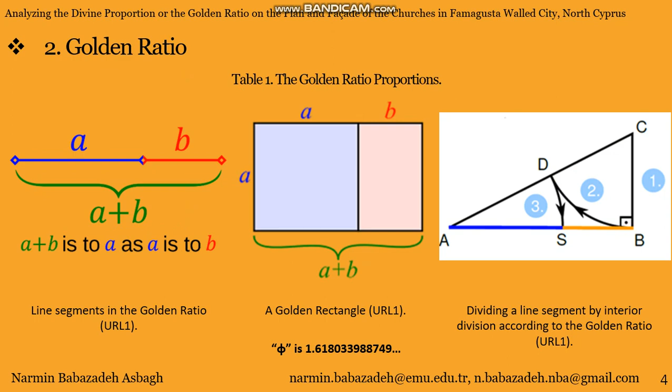The golden ratio is the proportion which is if we divide A plus B to A, that is the ratio of A to B, and the number is phi, which is almost 1.6, then we can say that this rectangle has golden ratio.

Fibonacci numbers. The Fibonacci sequence is a series of numbers which are added by the previous two numbers. That is, 1 plus 2 is 3, 3 plus 2 is 5, 5 plus 3 is 8, 8 plus 5 is 13, and that is going on like this. So if we divide the Fibonacci numbers to the previous number, the ratio is near the number that is phi, that is 1.6. And the more this number grows, the more the ratio of the dividing of a Fibonacci number to the previous number becomes nearer to the exact amount of phi, that is 1.6.

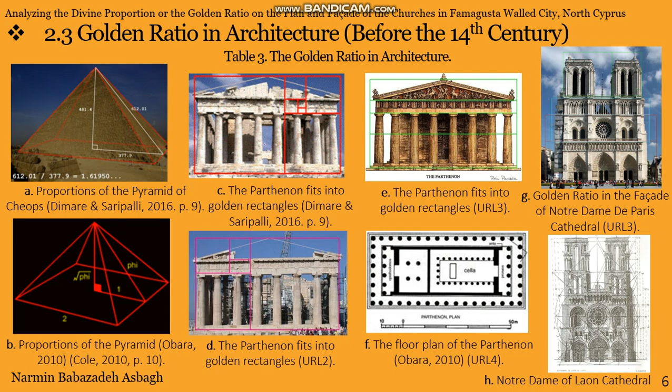It has been said that the Pyramid of Cheops, the Parthenon Temple, the cathedrals of Notre Dame de Paris and Notre Dame of Laon have golden ratio on their facades and plans.

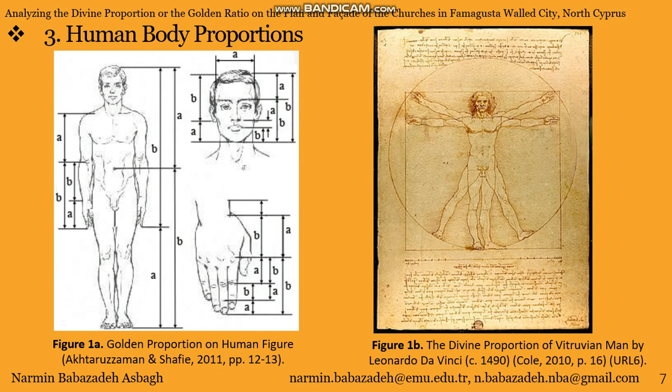At first, in 1490, Leonardo da Vinci drew a Vitruvian man, which shows the human body inside a square and a circle with open arms, which suggested that the total height of a human body and the total width is the same. It has also been said that the golden ratio is on the different parts of the body, including the face, hand, and all over the human body.

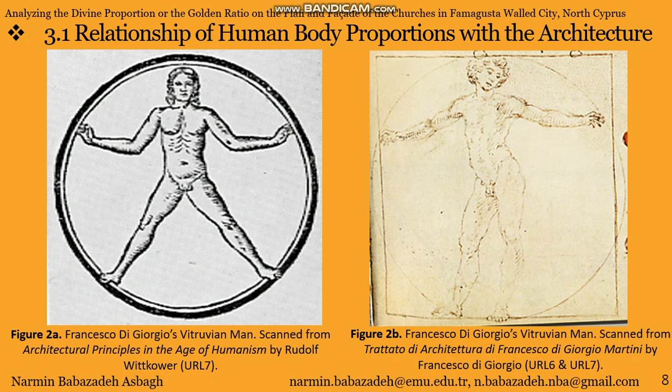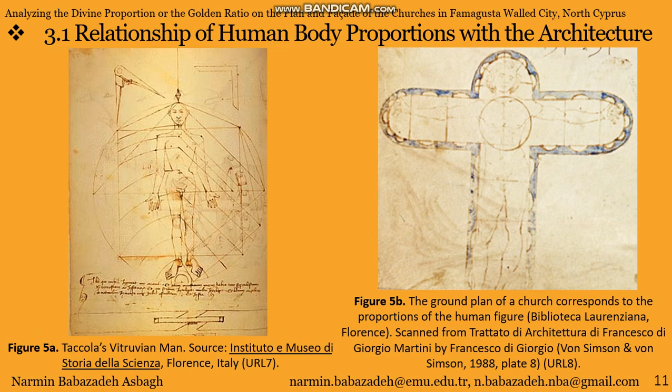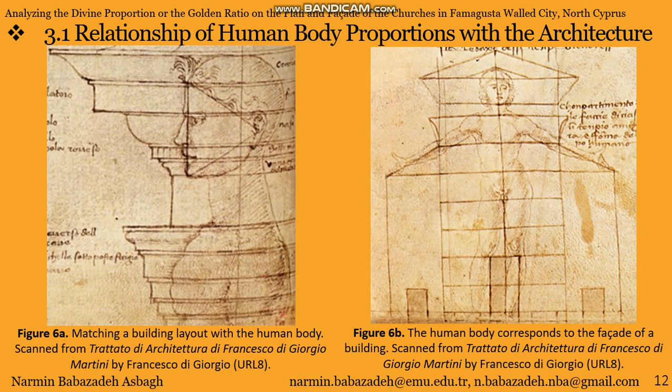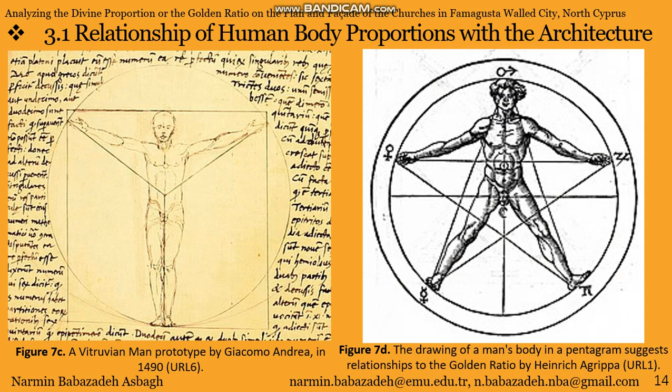On the left, the Vitruvian Man of Giacomo Andrea, and on the right, the drawing of a man's body in a pentagram that suggests it has the golden ratio, drawn by Heinrich Agrippa.

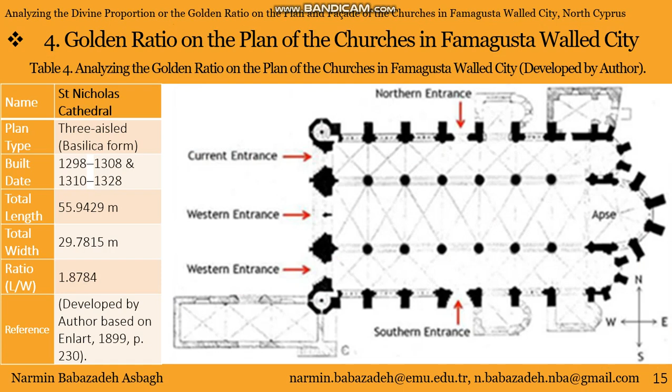All the plans of the churches in Famagusta walled city are measured by laser meter by the author, and the total lengths and total widths and their ratio are going to be seen in these tables. The ratio of total lengths to the total widths on the plan of St. Nicholas Cathedral is 1.9,

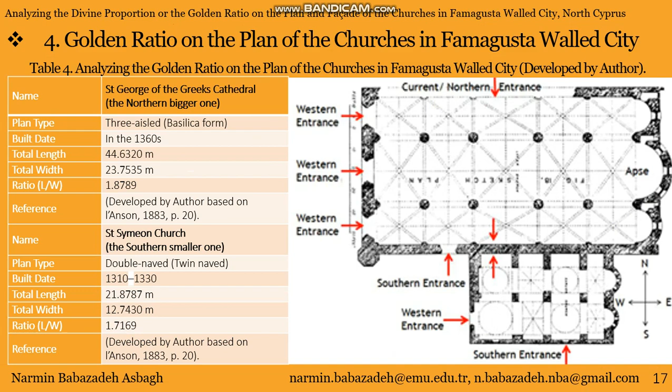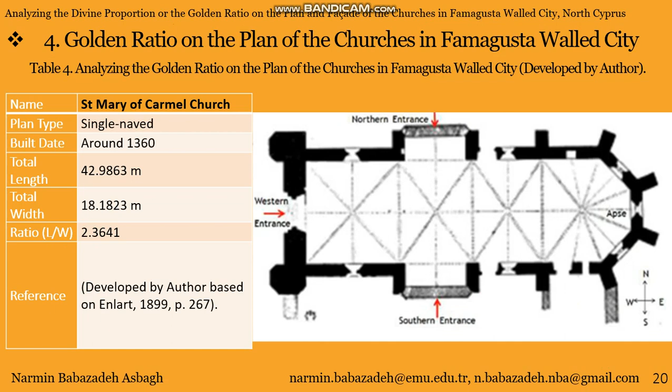1.7 in St. Peter and Paul Church, 1.8 in St. George of the Greeks, 1.7 in St. Simeon Church, 1.5 in St. George of the Latins Church, 2 in Franciscans Monastery, 2.3 in St. Mary of Carmel, 1.7 in St. Anne Church, 1.2 in Nestorian Church, 1.9 in Templars, and 1.6 in Hospitaller Church.

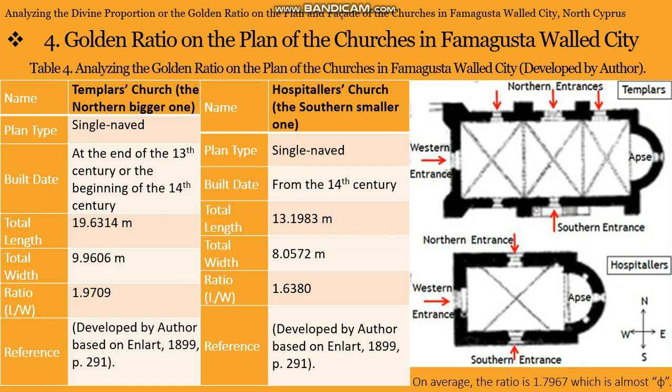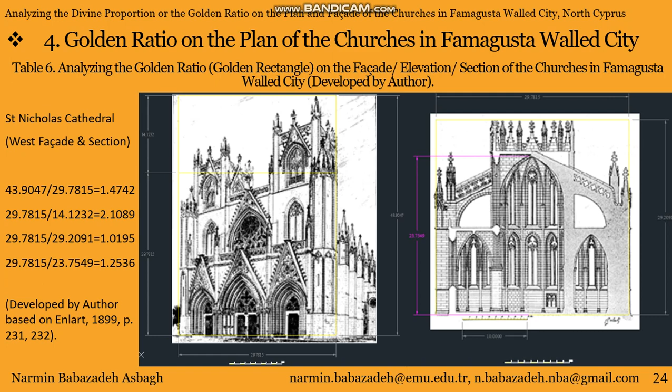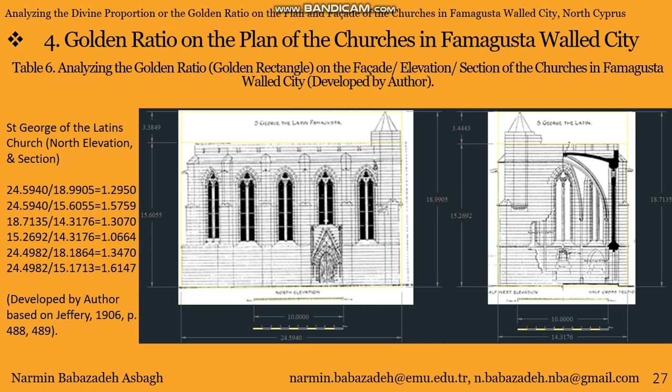Then the facade, elevation, and section of the churches in Famagusta walled city, and the golden ratio and the proportion, if there is golden ratio on them, is going to be shown in these slides. You can see west facade and section of St. Nicholas Cathedral, section of St. Peter and Paul Church, section of St. George of the Greeks Cathedral, north elevation and section of St. George of the Latins Church, west facade of St. Mary of Carmel Church, section and southwest view of St. Anne Church, and north elevation of Nestorian Church.

On average, the ratio of the lengths to the widths of the rectangles on the facade elevation of the selected churches in Famagusta is almost 1.5, which is almost phi, that is 1.6.

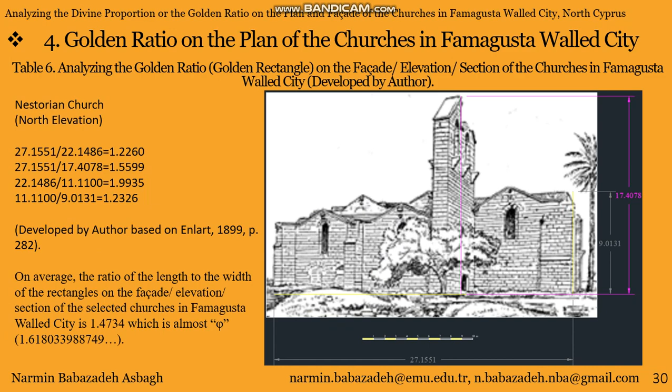Conclusions. Churches and cathedrals were considered the holy house of God, which represented the perfect proportions of the Holy Jesus Christ and or Holy Virgin Mary during the medieval era. The golden ratio is supposed to have the divine proportion, which is the perfect ratio of the lengths to the widths of a rectangle.

When the precise dimensions of the case studies in this research are measured, the ratio of the total lengths to the total widths on the plan of the selected remaining churches in Famagusta walled city is 1.7 on average, and the ratio of the lengths to the widths of the rectangles on the facade elevation section of the aforementioned churches is almost 1.5 on average, which are almost phi, that is 1.6.

It can be concluded that the selected churches in Famagusta walled city are built according to the golden ratio, and the people who built these churches paid precise attention to the divine proportion for aesthetic reasons. A more detailed study and research can be done about the numerology and also the golden ratio on the proportions of the interior spaces of these churches, as numbers and divine proportion are important aspects of the architects of those days.

These churches, just like all other precious historic buildings and sites all over the world, are belongings of all the people in the world, no matter what their nationality or religion, race or sect is. This precious heritage is not just the belongings of the people who are currently living on this planet Earth, as they do not just belong to their builders of the past time, but also they all belong to all the